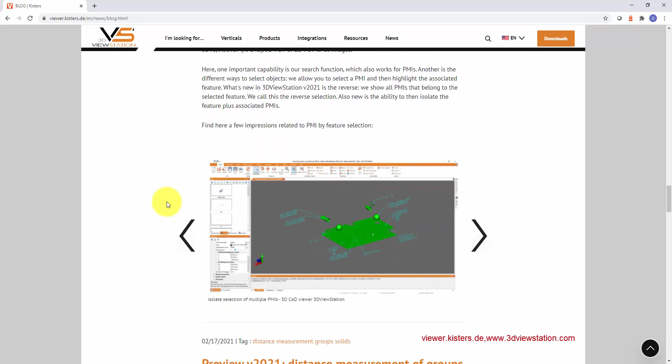A little bit more below you find a whole series of previews with a lot of descriptions describing the use case, the context where these functions are used, or which alternative functions these new functions belong to. I will show these various enhancements live in the 3DViewStation product.

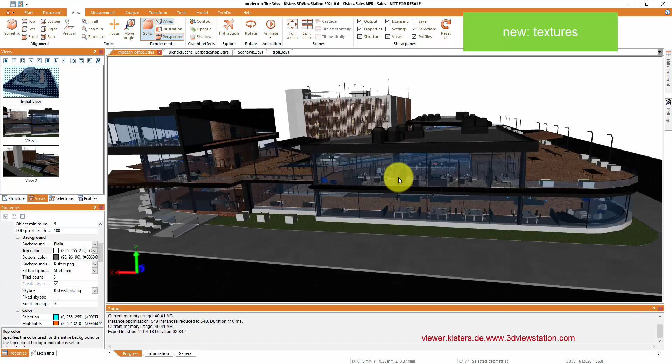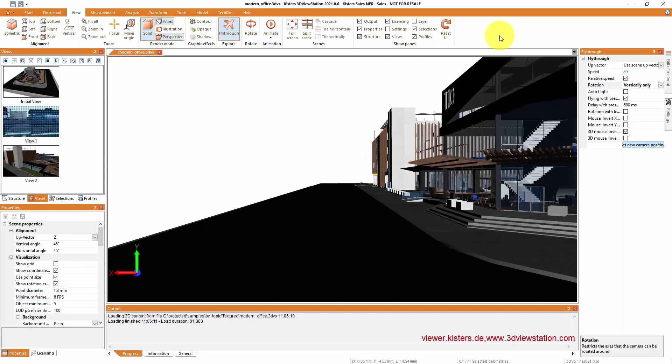Let's start with textures. Here we've chosen a large building with a lot of textured objects. For instance, the floors show textures, concrete walls, bricks and so forth. We use our fly-through functionality to fly out of that building and rotate around. This isn't only useful in AEC or BIM industry, but also in MCAD space, with nice intense effects like rusty steel or whatever.

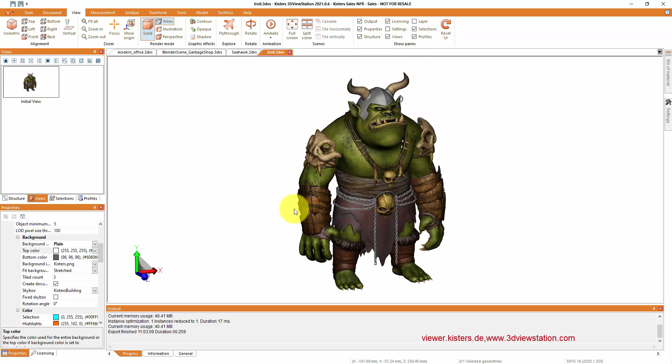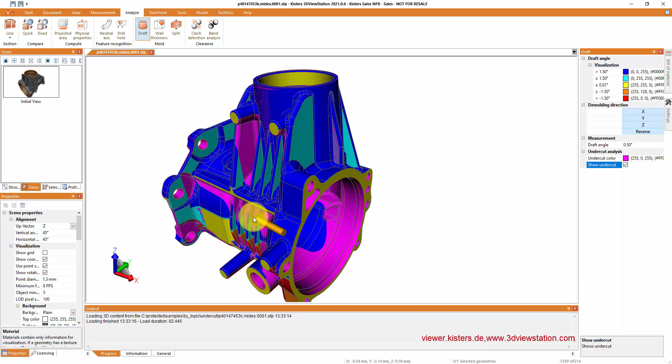Let's go to analysis. As part of the draft angle analysis, we've added an option to show undercuts. We first choose the main direction for draft analysis, and the pointer shows the draft angle. If we activate the show undercut option, in magenta or another color, 3DViewStation will show the areas where you probably find undercuts.

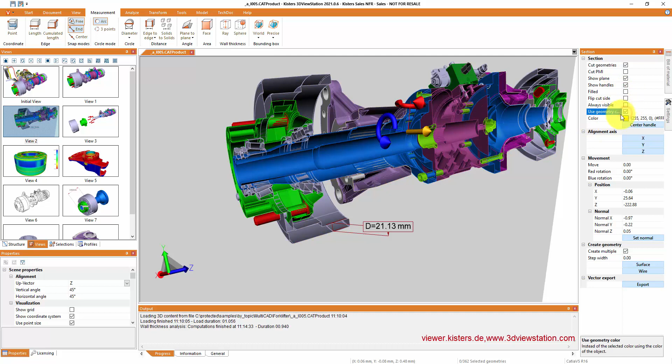This might be helpful for people in casting and die industry. On the sectioning side, we use one color, default yellow, for showing section lines. We can also fill the objects according to that color. We already used the object color for showing sectioning lines, but what we didn't have before is the ability to fill these objects in their own color.

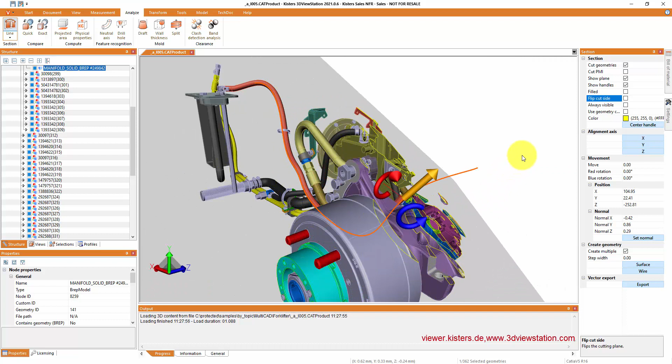Another function useful in sectioning is that 3DViewStation can position the section plane according to a line we will follow.

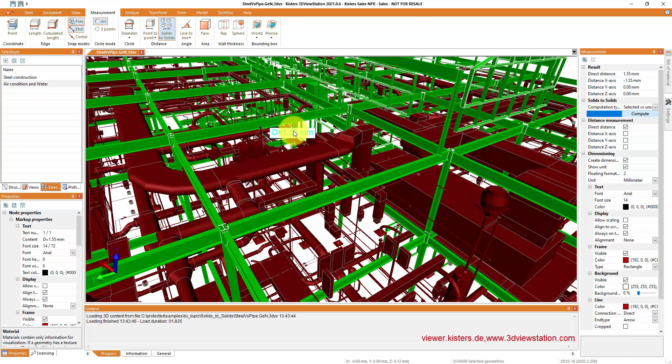Solid-to-solid calculations are very time consuming, and what we've done here is a nice enhancement, making it very fast, so we can calculate, say, 15,000 objects against 10,000 other solids and find the area of closest distance.

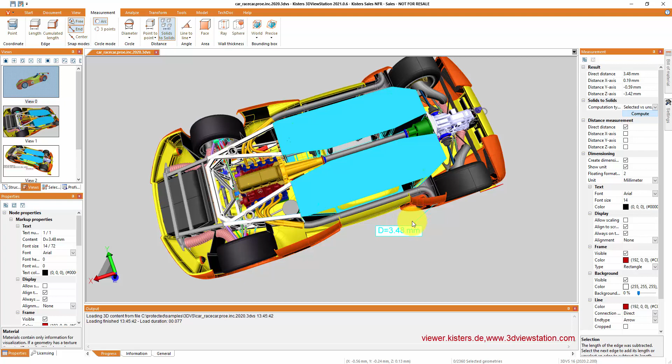Just to show you where that is inside the object, we've prepared a view here. Another example, use case in the automotive industry: the exhaust should not touch the rest of the car, it might get too hot. So let's calculate the minimum distance and see where that is. It's somewhere where it's leaving the body in white, so maybe you'll have to redesign something, or maybe it's okay.

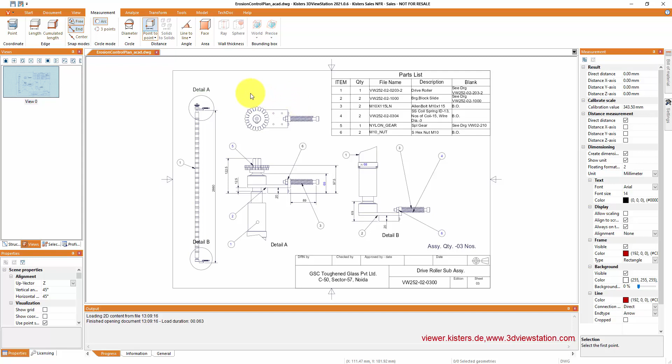A new function, useful not only for 2D but also 3D, is a snapping function. So far, when you moved your cursor close to a line, we highlighted where it would snap to. What we added now is that we can also use other characteristic points, like the endpoint of a line, snapping to the endpoint or the center point. That works in 3D as well.

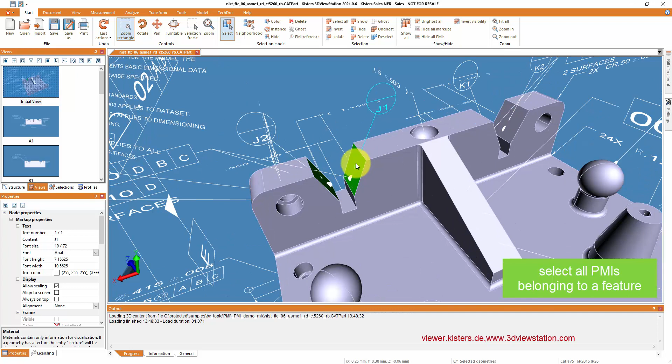PMIs are very important. What we had in the past already is: you click on a PMI, it highlights the feature associated with it. But what we added now is the other way around - you select a feature and all the associated PMIs will be highlighted, and you can also isolate them.

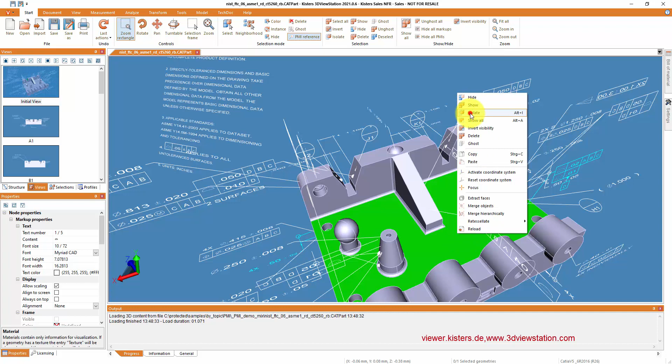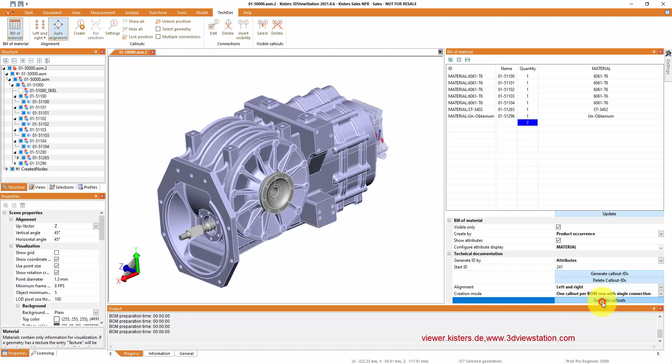Attributes, very important for many customers, are typically bound to product occurrence, not necessarily to geometry. You can add any kind of attribute now for the BOM as well - add it, remove it. We already had material added to our BOM list, and now you can generate callout IDs from the material, not just as a number. As with regular balloons, you can now automatically generate and position them in your model.

If you rotate, they will be auto-aligned or whatever. This is standard functionality.

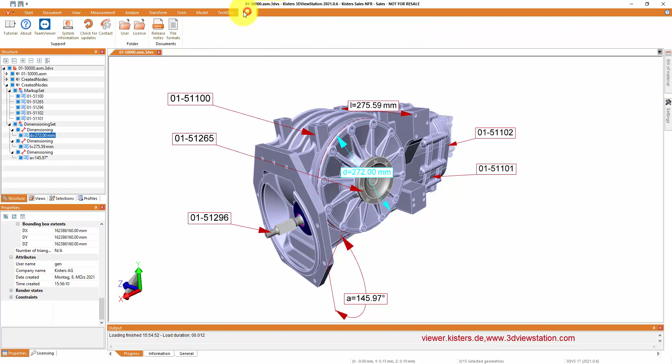Attributes once more, with markups: we've been requested that you'd like to see who added a markup and when, and so forth. So we now have an option. If you go to the resource and presets XML and go down to the bottom, you should uncomment that section, and then with the next start of 3DViewStation it will generate these attributes automatically.

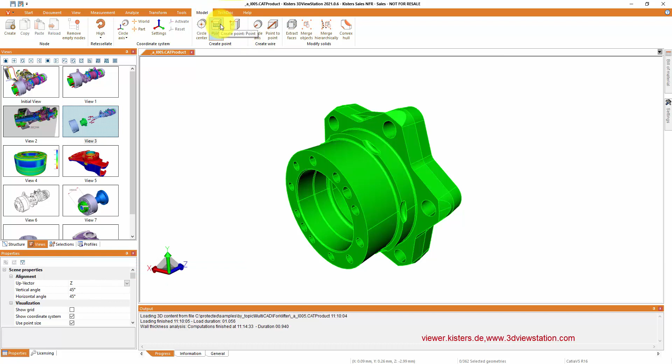We had a set of functions to generate help geometries like points, lines, and center lines, for instance, and center points. What we now added is the ability to create an intersection point of two lines which do not touch each other.

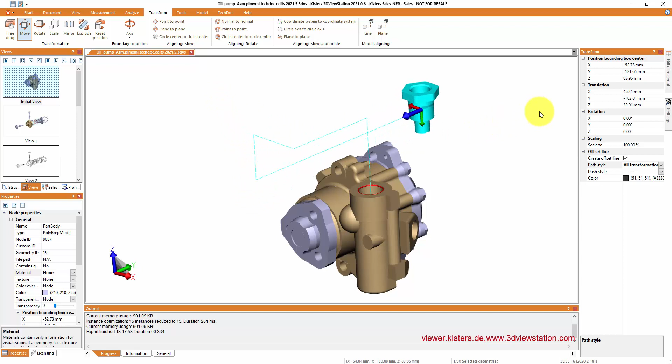On the transformation side, we've been proud that our transformation function automatically optimizes the path and callout lines, the offset line, according to your movement. But sometimes that's not desired. Sometimes you'd really like to record a path, for instance, for a disassembly instruction, and in 3DViewStation we now enabled the ability to really remember that path and not optimize it for you.

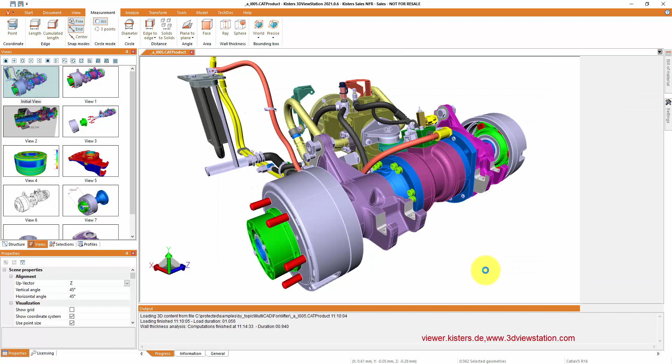Another feature request from customers is the possibility of exporting all views to a single file. In the past you could export a single view to PDF or PNG, but new is this icon here - let's export all of them into one single PDF. Maybe that's helpful for an overview. The export is quick - we open the PDF and see an arrangement of all those views.

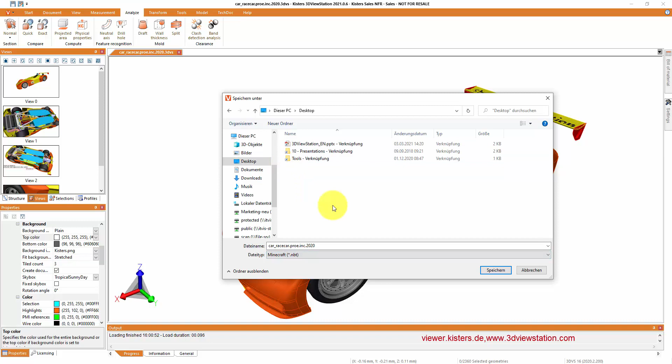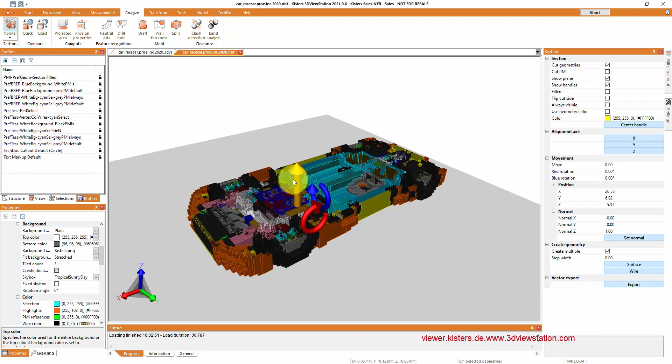Finally, our developers are fathers and mothers, so why not do something easy for us and generate Minecraft files, NBT files, out of any kind of CAD model you've loaded. Even that race car is a very complex one - with a few clicks we can generate an NBT file, a Minecraft file, which you can import into your Minecraft game. If we section into it, you'll see everything is still inside the model, just showing that's possible. Of course you could generate the convex hull before.